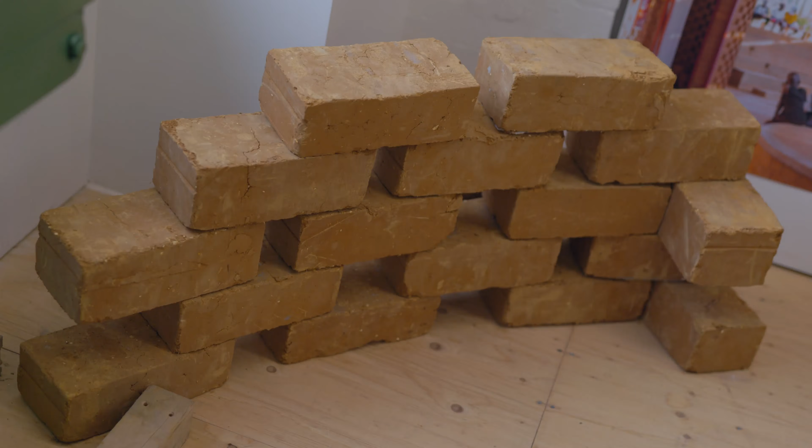So what you have to imagine is that it's a very complex space to work because it's really, really remote. That's the first thing. So you want to use local materials as much as you can. The second thing is that we were looking at using fired bricks for the building. The problem with fired bricks is that you need wood, because they would use wooden ovens to fire the bricks. With 270,000 people living there, there's lots of deforestation happening. So we did not want to add to that. For that reason we decided to do these compressed earth bricks.

So these bricks are local earth, local soil, mixed with a little bit of cement and a little bit of lime, and they get pressed in this machine here, which is quite a complex-looking machine. But really, you put the earth in here, close it, and then this thing comes over, I'm not going to do it now, and you compress the earth. 50,000 of these bricks were made. And this was all done with the help of the refugees themselves, so it was a way to also get employment going in the refugee settlement.

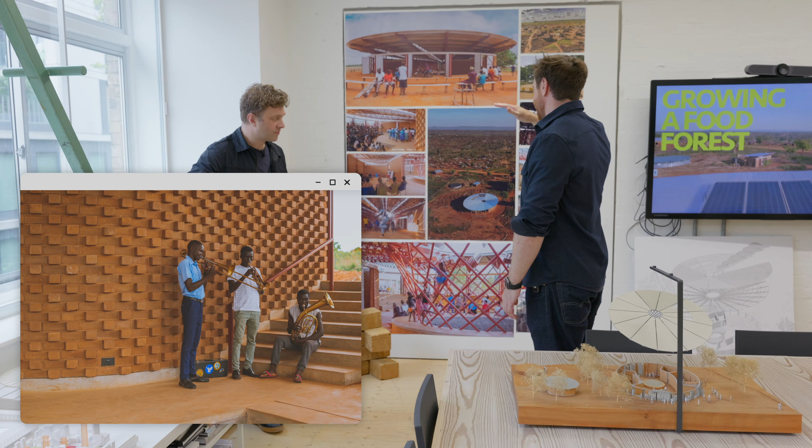That's really cool. I'm sort of seeing a brick pattern going on, almost like a parametric pattern. The idea of going from computation, scripting, all the way down to literally making the bricks is really... It's probably one of our most computationally heavy projects that we've done. Really? And it's for an interesting reason, because we did this project pro bono.

So I wanted to make sure that we could do the project, so I had to do it with as few people as possible. So we ended up doing this project myself, really, and one or two other people, who were very good computational designers but also really great architects. And we did that. So this whole model here, which you can have a look at, we have a little axo. Architects love axos, right? Including myself.

So the whole model was done parametrically. Yeah. The roof as well, quite a complex geometry, of course, that you see, but rationalized in such a way that every single part of the roof is made out of just very standard material. Yeah. It's straight tubes. It's flat panels, although complex geometrically, it was in the end very easy to install on site. Yeah, you've got corrugated steel roof, pipes, bricks. It's all fairly straightforward.

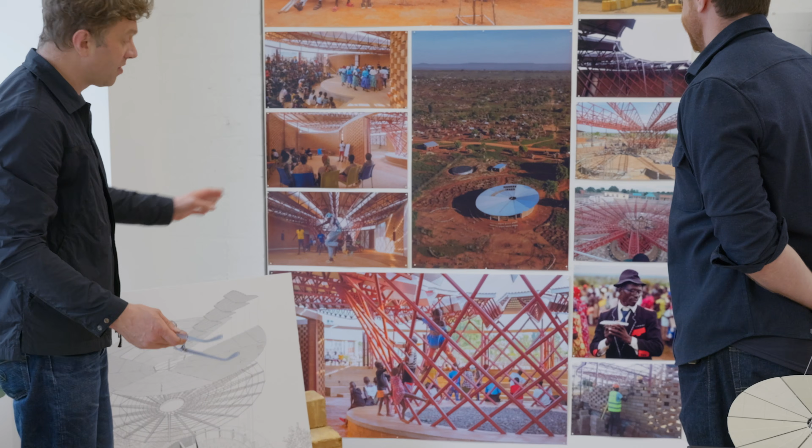It's all very straightforward, but you see these kind of rather complex... But then you've got really cool internal structures. But these are just simple hyperboloids. They look like curved geometries, but in fact they're super simple, made out of straight pieces of steel.

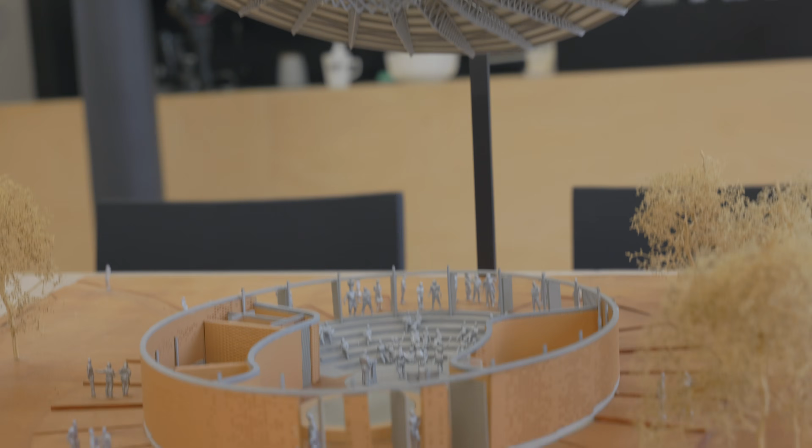The other interesting thing is, you might think, why do you have such a complex geometrical elliptical shape, right? I'm not sure if you remember from your maths or geometry classes how to set out an ellipse. But an ellipse you can literally set out by having two pins, a piece of wire, and a pencil. You can actually draw it because the distances from the two foci to the point always add up to the same distance. Right.

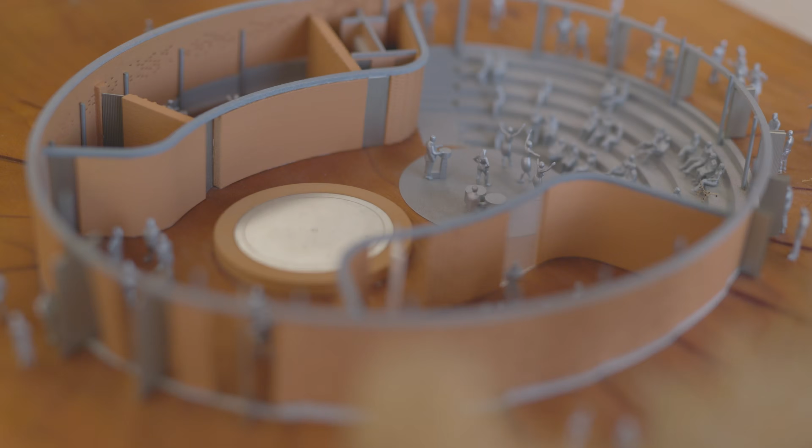So they were able to set this project out with just two stakes and a huge wire, super simply on site. Really cool. Because that was a problem: there was no electricity, there's no water, so we had to build everything first for the contractors to be able to live on site and then to be able to build the building. So a huge complexity when you want to do something like that.

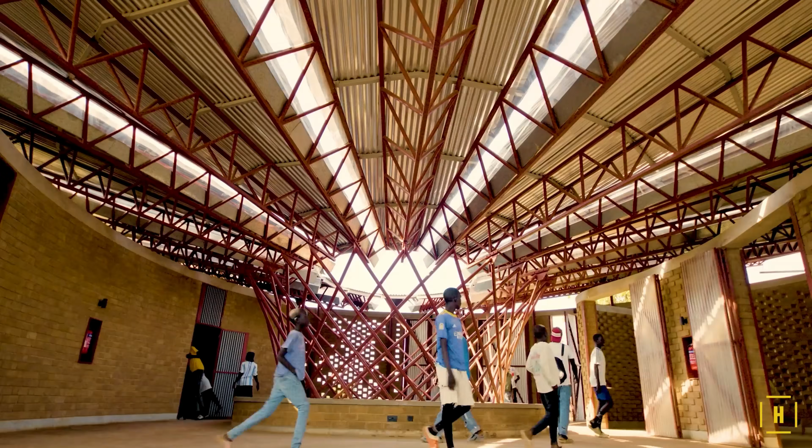I love everything about this project. It's just got computation. The power of computation means smaller teams. I always talk about the 10x team. If you have designers that know computation and fabrication, you actually work out how to build this thing. And you've got features. And did I see somewhere you're collecting rainwater as well?

Absolutely, yeah. You can see here, rainwater falling in. Because there is no running water, there is no sanitation really, there's no electricity, we thought, we need to create this big space, we need to cover it anyway for the sun and shading, we might as well collect all the rainwater. So all the rainwater gets collected in this one point, and instead of just having a downpipe on the side of the building, we made it much more. We want to celebrate the fact that we collect all this water.

So you can see all the water being collected in this space, and then it gets filtered into these big storage containers here, and then the community can actually use that water whenever they need to. So it's actually for the whole community. They can get fresh drinking water whenever needed.

This is a sick project. I love, like, this is design. You're actually solving, it's science and design at the same time. That's cool. That's what we're trying to do.

Also, the bricks themselves, the brick patterns are quite interesting. I'm not sure we have the right drawing. We kind of do. So with the brick patterns, we wanted to make sure that the acoustics work really well, right? Because we have a music classroom here, we have a recording studio there. So we worked with Arup here in London, and we wanted to make sure the right absorption and diffusion happens in these spaces. So you see the bricks sticking out here for diffusion patterns. And in other spaces you see the bricks actually absorbing. There are openings in the bricks that absorb the sound as well.

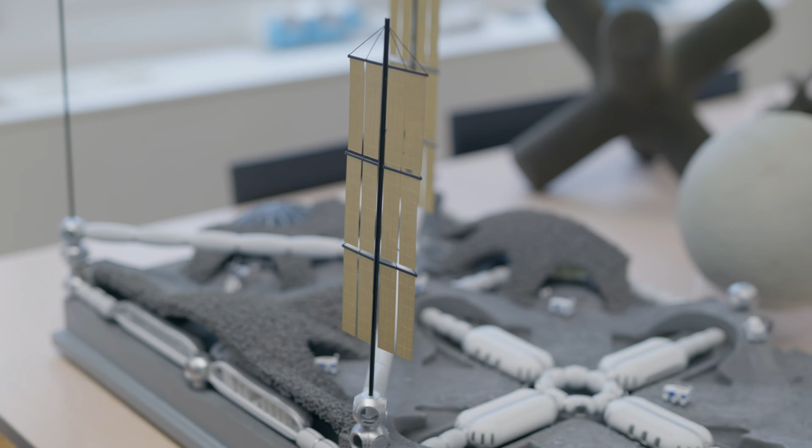First of all, you might see these big vertical sails. Well, these are photovoltaics. And you might wonder, why are they vertical? We don't normally have photovoltaics vertical. Well, there's a good reason for that, and it is because this is a model of the moon. We did have a site for this project. The site is on the South Pole, on the edge of a crater called the Shackleton crater.

So why would you want to be there? That's my next question. For two reasons. First of all, you've heard of the dark side of the moon? That is because the moon always faces the Earth in one way, and goes around us in this way.

Which means one side actually is dark and the other side has light on. Now, if you're on the equator on the moon, a moon day would last 28 Earth days. It would mean 14 days you'll see the sun, and then 14 days it will be night, which is quite a problem because it gets really, really cold. Right, you don't want to do that.

So of course, in the Apollo missions, they landed around the equator quite often, and during those 14 days that it was light. But imagine if you have a base there and it gets really, really dark. So what do you do? Best way is to go on the poles, because on the poles, on the edge of a crater, you would have the sun on the horizon, and it would go around you over 360 degrees over 28 days.

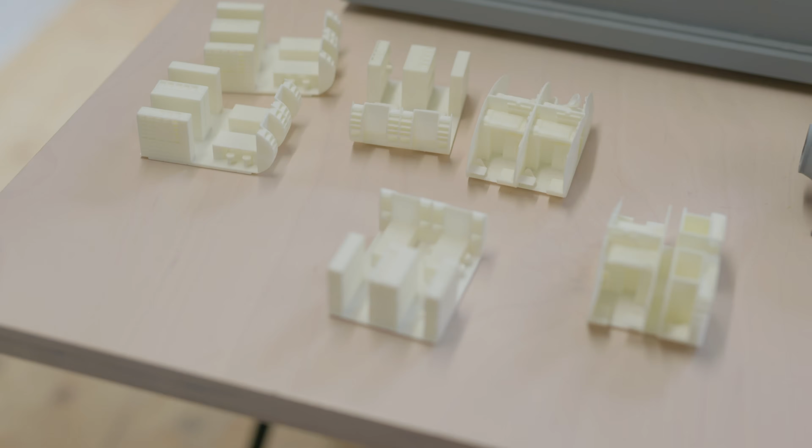That's very cool. So let's start with the first thing: where are our astronauts going to be living? Well, they're going to be living in these pill-shaped pods. Now we previously saw our NASA project where you have these round spaces. This kind of inflatable round space is difficult to plan out. So we decided for this project to do inflatables that are more of a pill shape, which means the central part is much easier to space plan. You have very straightforward, more regular spaces that you can plan out. Much easier to plan.

Of course, you can't just go from one building to another building on the moon. It has to be all connected, right? But imagine you have many of these spaces. If I live in one part of the base and I want to go to another space, I need to go through all the other spaces, which is a bit weird. Think about it, you live in a city or in a community. It's like going from this building to the building at the end of the road and having to walk through every other building. You don't have a street.

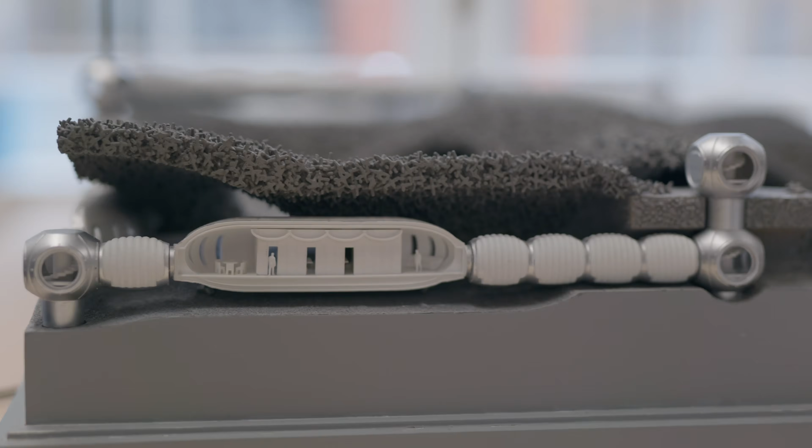You can't go outside. So we came up with this idea to create streets, and that's these things. Yeah, it's like a human hamster tube. So we're able to just walk from one end of the base to the other without having to walk through all the other spaces. But on top of that, you also want to get out. So we have another layer, this layer here, where you're able to get out with a rover or with a suit port, which are those. So you can get out as an EVA, extravehicular activity. They love acronyms in space. So it's a system on three levels.

So the philosophy would be these pods would be brought with us and then inflated, so they're bigger? Exactly. We always think of these as inflatables. They probably unfold and inflate. We've looked at a few systems for doing that. And they would inflate underneath these shell structures. The reason we have these, very similar to our Mars project, is to protect our astronauts from radiation. Earth is fantastic because we have an atmosphere and electromagnetic fields, which protect us from solar radiation and galactic radiation. On Mars and the Moon, we don't have that, so we need to protect ourselves.

The best thing to protect yourself is having mass around you. Best place, a cave. It would be fantastic to protect ourselves. But we don't have caves, or we're not quite sure where they are. So the idea is to create our own caves. I've previously shown our Mars project where we 3D printed layer by layer. Here we want to do something different, because we think 3D printing, and I've done a lot of 3D printing, is quite tricky. So we're going to work with these hexapods.

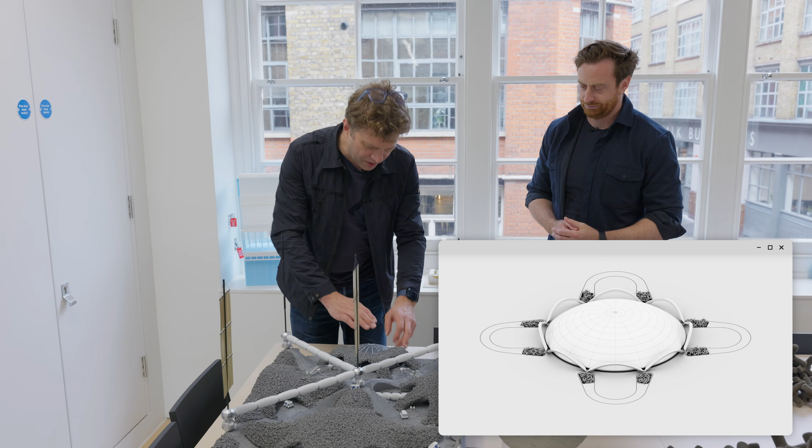Now, that's incredible. How'd you do that? Well, we start off with a big inflatable, like a rough inflatable, like a big mold. Mold, really. So it's a big inflatable. As you can see, we're going to throw these little hexapods on top of it, right? So cool. One by one.

And once that is done, we take this inflatable out, and then we have this freestanding structure, as we do over there. This is the 1 to 10 model. And then afterwards, we bring in the smaller pods and inflate those. So those things will be then inflated underneath these kind of structures.

Super cool. Yeah. It's my new catchphrase for the tours, but that's got to be one of the... So it's slightly different to all of our space projects. We kind of each time learn from it, and the next one we improve it and hopefully find a better solution each time.

This model here is not glued or anything, right? Or is it? Is that a trick question? Okay, this is the trick question. This model, so we've done different ones. So we have done models, and I'll show a video of that later, where we created an inflatable, had all these kind of loose elements stacked and then deflated, and it worked.

Okay. This one was for a model that was exhibited at the RA last year. So because it was exhibited and being moved around a bit, we did actually have the 3D printer slightly overlapping. I see. Oh, you caught me. I could have fooled you. Oh, there's a few loose ones on top, so I'm not gonna lie, because it had to be exhibited. We had to make sure it was stable to be moved around a lot. It's super cool anyway. And this is about a 1:2 scale. So the real ones will be double the size.

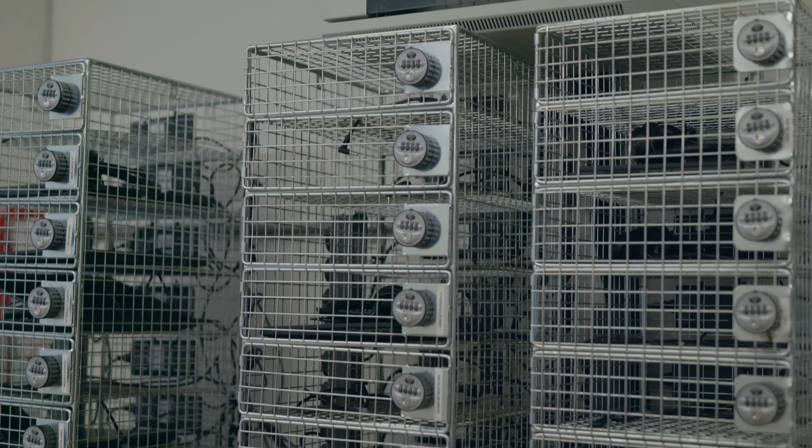So people ask us, why do we have these laptops in these cages, in these hamster cages, right? Well, it's just an interesting way for us to work because everybody has their high-end laptop, and when they come into the studio, take their laptop, sit down, and have two big screens that they can work with. When they go home in the evening, they can put them in here, hook them in, and then at home, if you want to do some work on the weekend or something like that, you just go from your laptop at home or from your iPad and your Citrix into those.

Wow. So you can just remote in from your tablet or whatever. Absolutely. And it of course saves space that your laptop is not sitting on your desk at the same time. And for cooling, we just have them as cages. It works really well for some reason. Really nice system, because people would always complain like, I'll go lug my laptop home, because they're usually bigger and they're really heavy machines, and the power block is huge for these laptops.

So we thought this might be. We've never seen that before. I think it's an innovative solution. Yeah, it's kind of simple. I quite like simple things.

So this is our main studio space where most people work. We have about 40 people here on any given day. Just some models in the middle here, some mock-ups. Everybody can sit anywhere they want. So they take their laptop and sit wherever they need to, and sit with colleagues or form a group for a certain day or something like that. So it's actually quite a flexible space. Very, lots of light.

Yeah, I was going to say it's a very London Shoreditch warehouse. We're still in Shoreditch, right? Yes, we are. So this is quite a simple space, but I really like it. Yeah, it's very clean. And we have another space project.

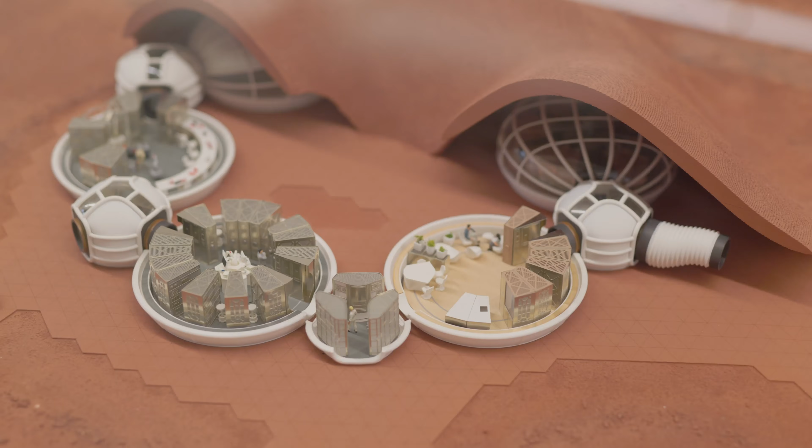So this was actually our first space project. This all started with this, really. This was your first one. So this is our project we did for NASA, a competition that happened quite a few years ago now. There was a competition to design a 3D printed Mars base. It's again this idea that we need to protect our astronauts from radiation, right? Lots of radiation happening on Mars, from the sun, from the galaxy.

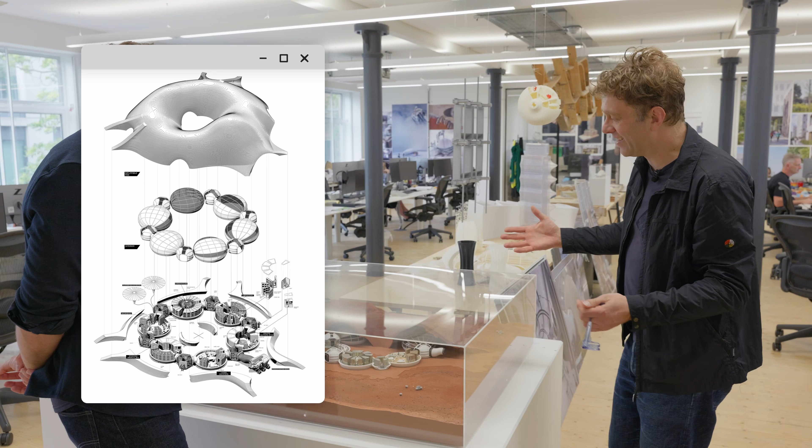So you see this big shell structure here, right? Just half of it, and that is literally a cave that our astronauts can live in. And underneath it, you have these kind of pods that are inflatable pods. You can see them slightly there. I've taken the top off. It's a radial organization, right? Very modular. And the idea is that these are kind of racks.

So the things you see there, these are lab racks that are able to move. So you're able to open them up, do an experiment, and then close them up again. A bit like what you have in archives of libraries. Right, okay, the movable racks that you have. Yeah. And we implement it for everything. So we have it for the greenhouse, the living space, the workshop as well. So all of these spaces are based on the same modular system.

Because it's kind of a critique on the current International Space Station. If you look at the International Space Station, what do you have? You have all these tubes, right? These kind of cans, which you can fit in a fuselage of a rocket, or back in the days in the cargo bay of the space shuttle. So they're just big round elements, all connected to each other. And what you get in the end is just lots of corridors. So space efficiency of the International Space Station is really, really bad. So this is actually a critique on the current idea of space stations.

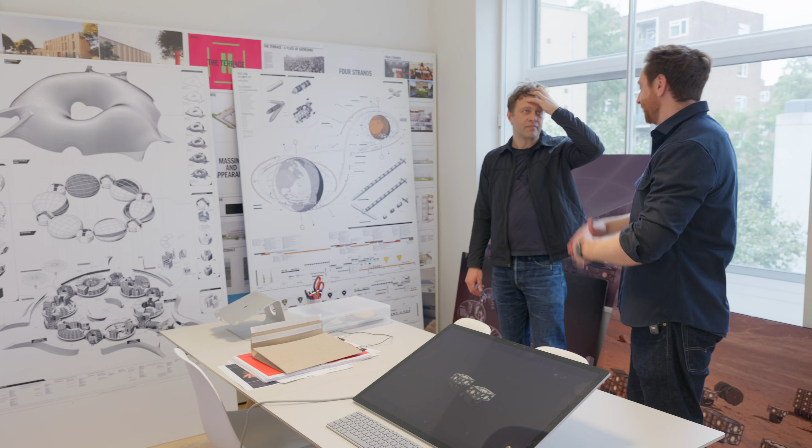That's what I like about these space projects, like we did one at BIG with NASA, and you actually present to scientists. They're just not going to buy any bullshit. Absolutely, and we very much run them like a design project with the astronauts and the scientists. In the middle, we organize a design crit, a micro symposium, and invite lots of specialists. The room is full of our drawings, and everybody gets a red pen and a post-it and can start drawing and saying what they think is wrong.

And the conversations are amazing. The ultimate crit. Oh, yes. And the great thing is the scientists and the engineers don't always agree, so we have some really heated conversations. They're not used to reviewing each other's work like that. They're more used to peer review through a science paper. So this loose way of looking at a design in a crit is something they're not used to. It's a bit like online beef, and then you put everyone in the room. Absolutely. So it's a super helpful crit, by literally rocket scientists. Yes.

So this is maybe an interesting project here. I just hung it up here. This is literally a next generation low Earth orbit station. The International Space Station is getting old. It's older than 20 years now.

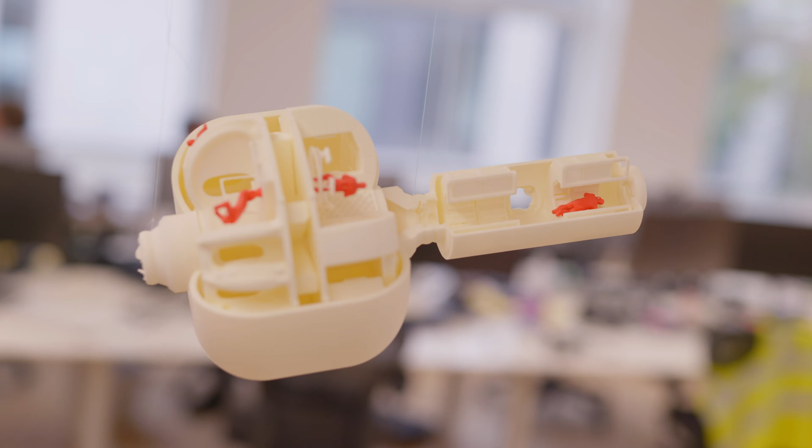And it needs a bit of a makeover. Needs a bit of a makeover. Renovation. It probably needs a new generation station. NASA has been funding 4 different companies now, and we've been working with one of them, and that is called Orbital Reef. Orbital Reef. So this is next generation low Earth orbit space station.

It's a collaboration between 2 companies. It's Blue Origin, Jeff Bezos' space company, and Sierra Space. Sierra Space delivers this module, and that's the one that you see right here, right? And we've worked with them to show you that it is real. This is one of the test modules that they are building, right? Again, an inflatable. Yeah, I was going to say, what?

Wow. It's an inflatable. And we've been looking at how can we fit this out in a little bit of a nicer way than the current International Space Station, right? So you can kind of see some of the drawings. And for every project, I have to do this kind of axo line drawing. Love a good axo.

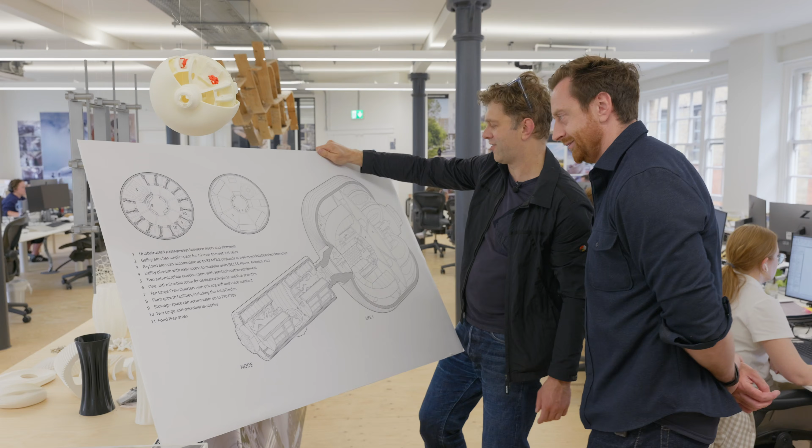We have this big space, which has, because you're in space, what way is up and down? I guess you can just float around. Yeah, but from a psychological perspective, NASA really wants to have a direction in a space. So it's really important to always have the same up, down, left, right. So what is a wall, what is a ceiling, what is a floor? Still very important. But it doesn't matter always which way up or down.

So what we did with this kind of awkward inflatable space is that we said, okay, well that way is up for this floor, and for that floor that way is up. So we just mirror. So you're saying you got the same reference of the roof. So the space is always, and of course it's better to have a space where the ceiling curves over you than the floor curves away. Yeah. Right. So and then the life support systems kind of sit in the middle of that.

Wow. The other thing was this space here, this volume. This is a hard shell volume. It's not inflatable. This one was quite awkward because the diameter was quite small, and so instead of organizing it in this direction, we decided to organize it in that direction, and you get a module that has no floor, really. So it's kind of a vertical space, but you are in space. You don't need a floor, right? So that one is more of a vertical direction.

I think I have a drawing of that here somewhere. Yeah, here we go. That's it. Oops. So here you have the kind of vertical volume, and that would be like a control and lab space. Wow. And of course, a big view out. Big, nice window. You always need that. Yeah, these space products, you just rethink everything. Gravity doesn't even exist in some ways.

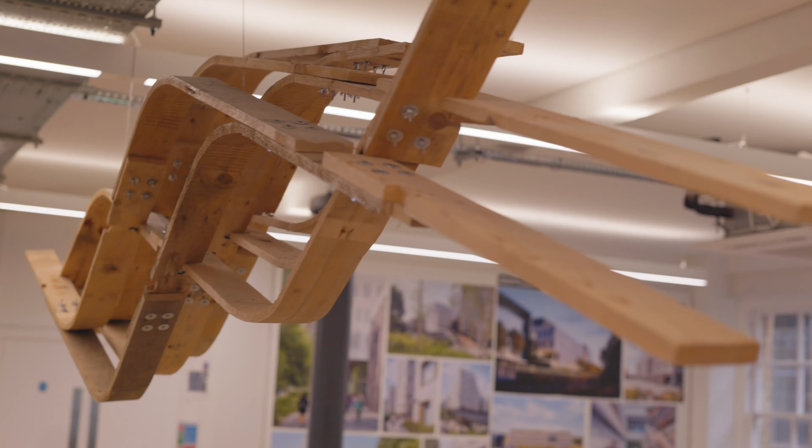They made their own little steam boxes and were able to create these curved elements. And after they had it at Bedford Square for a few weeks, they were going to recycle it, and we said, well, maybe just bring part of it here in our studio so we can actually talk about it. Okay, so they're made from pallets, and did you guys, I assume, script it beforehand?

So it was the students themselves. They were actually doing the scripting. We really gave them the challenge. Okay. And the interesting thing was they made an AR model, so they used a HoloLens as well to be able to assemble it on-site. I see. That's really nice.

I feel like this could be a cool Burning Man structure or something like that. Yes, that's true. But that's great. It's really cool, low cost, but again, high tech. Yeah. Use of computation and augmented reality.

Absolutely. Pretty cool. Now you might have seen these 3D printed chairs we had in our Mars project. And this is the next step of that, right? So this has a bit of a history behind it. We did the Mars project. We were able to create these large pieces of furniture. But we started to think, well, if we can do these large pieces, we can probably do parts of architecture, parts of buildings. Why can't we do it bigger, right?

And at that point, we had an opportunity. We were invited by the Norman Foster Foundation to run one of their robotic workshops. So we used that as an opportunity to start thinking with 10 students back then. Could we actually use the advantages of 3D printing and the geometrical advantage that we have to create building blocks, facade elements, and start to conceptually think about what we could do.

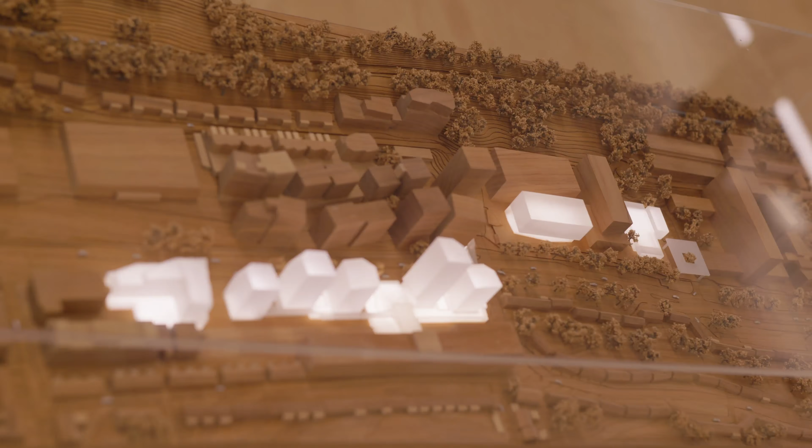Really cool. And this building, is that part of the school? That's actually the business school. There was an engineering school as well, but it's part of a much larger master plan, which you can see here. So this is the engineering school, the business school that you just saw, and this is one of the student housing blocks. This is the other one. So 2 blocks of student housing, and then a bridge in between as well. So it's a full master plan. We started this about 10 years ago, and we've been able to build quite a few of the buildings on that master plan. Yeah, it's a big project.

So this is our second project in Africa. This is in Tanzania, a project called Hope Village. What you see here is the community center. It's actually part of a much larger project, where we will have 200 girls being housed who have a history of abuse. It's an organization that takes care of them, and they are living independently in different houses, 20 girls together each time. Yeah. And the client wanted to see if we could design a community center for it, like a community hall, which would also be used partly by the local village.

Right. So the brief for the project was to have a large open span space with a kitchen attached to it, and you could do performances in the space, but it could also be a church, it could also be for evening meals. Right. So similar to the other projects. A little bit similar, a community center. So we did 2 things. There are 2 parts of this building again: the walls and the roof.

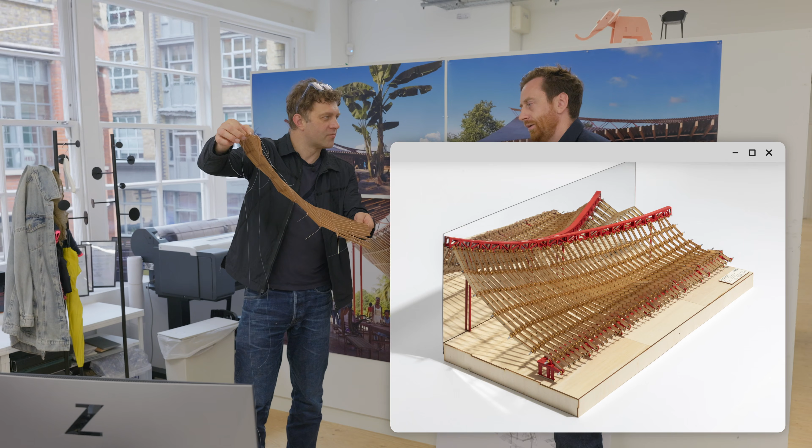To take small pieces of timber, about 2 meters long, and rig them up with a metal wire and some spacers. And what we could create is literally a tensile structure, a wooden tent structure. So we call it the wooden blanket. We worked with EOC, Eckersley O'Callaghan engineers on this, and you can see it best here in this render. We used, of course, Kangaroo and other form finding techniques to find what that ideal geometry would look like.

Wow, that's really cool. So we're still in the funding phase of this, so we need more money. The client needs more money to be able to get this constructed, but hopefully we can get it done really soon.

The idea was also with this timber tensile structure that it could be built fairly simply. So you have this central spine, right? Yeah. This Y-shaped spine, which is just built in local steel, and then from that you can just rig it up with simple scaffolding. You hoist up one by one these blanket pieces. Yeah. Right? And then a little 3D printer that you move around?

Yes, based on a WASP printer that EAC is already using. And we were even thinking, once this building is done, could we leave the WASP printer there, educate the local community on how to use this technology and see what they would print with it. Super cool. Again, really nice mix of computation, design, actually building stuff.